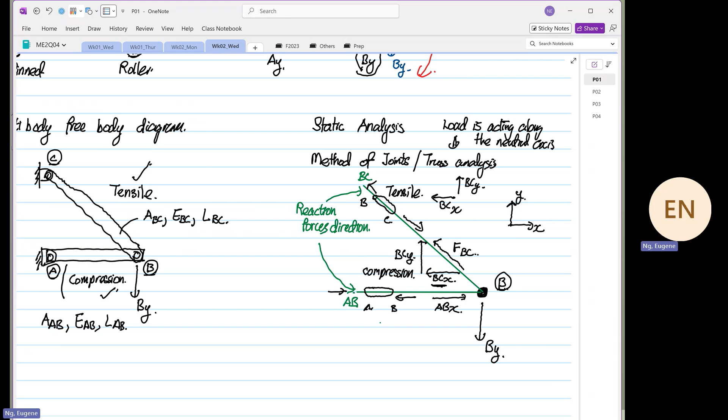So we know K is equal to AE over L. Yes? So we also are aware that this can be represented by this.

You see it now, right? So we know that this spring is going to tension, and this spring is going to compression. Okay, so this is our X and Y.

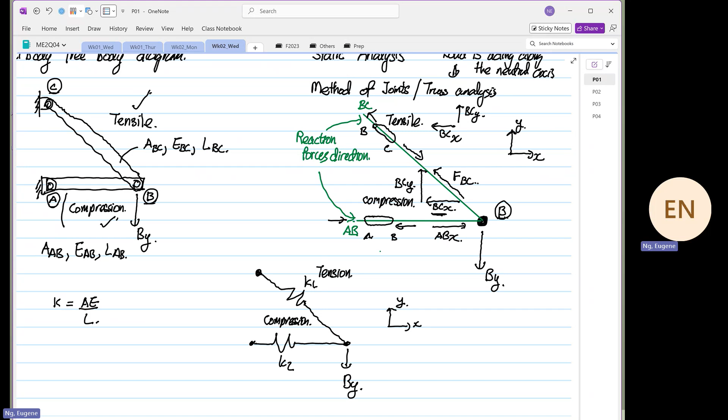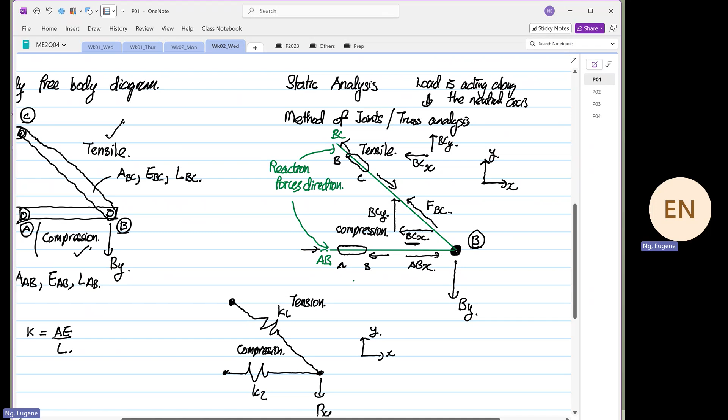Are we clear? So now you can visualize what mechanical system, like in a structure, relative to a real world. I hope this will give you the confidence to determine whether a structure goes in tension or compression. The most important thing is you have to apply Newton's third law.

Clear? No doubts? If mechanical engineers have doubt with this, it's as good as an electrical engineer having doubt about V equal to IR. Yeah, I have doubt with that, can't see it at all. But this you can see. Are we clear? Right, questions anyone? We okay?

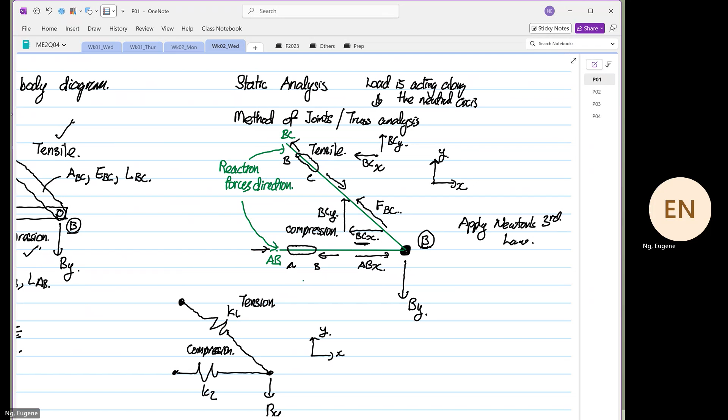Right, so let's now go to undamped free vibration.

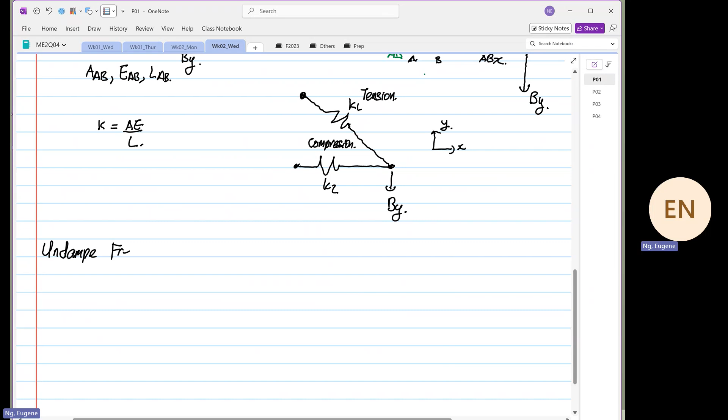Okay, so what we have now is we have a spring, and this is our K. And then with our spring, we attach a load. And because we attach a load, what we have is a mass, and then we have K.

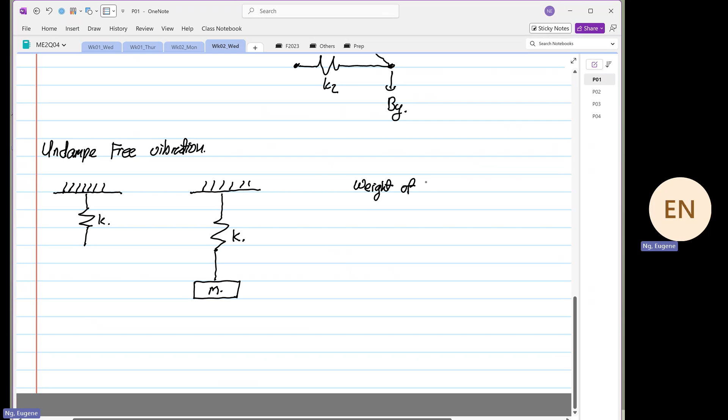I'm going to write this down: the weight of the load is equal to 89 Newton. And when the spring has a load, this is our delta Y, the extension of spring due to the load. This is equal to 0.1 meter.

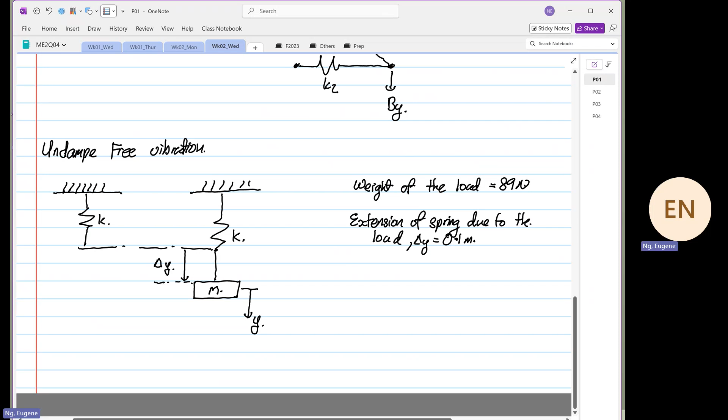And we are going to declare whatever is positive as coming down over here. So this dot over here, this line over here, is known as our equilibrium position. The spring extends due to the load.

Okay, so what we want to do now is determine the relationship between time and displacement.

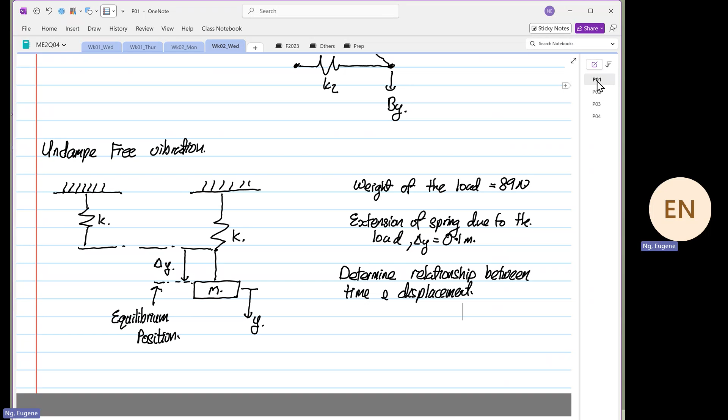What do you call an exploding monkey? My wife doesn't find this funny, but what do you call an exploding monkey? Baboon. Gee, you guys are sad bastards today, man. Yeah, I was told this joke on a Lion Safari when the driver started. I could not stop laughing until the end of the trip. And my wife was like, why are you laughing? Up to today, sorry, dark humor.

Coming back to here, so we know the characteristic equation is m d squared y over dt squared plus c dy by dt plus ky, the whole thing equal to 0, right? And we know that alpha is equal to c over 2m, and then we are aware that beta is equal to square root of c squared minus 4mk over 2m. We are aware of this, but in the system that we have.

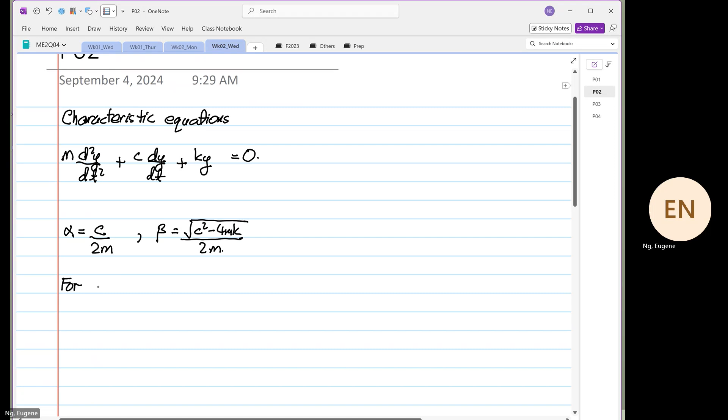But for undamped, now be careful, okay? Undamped and underdamped are two different things. Are we clear? Okay, don't be like me, okay?

So for undamped system, we know that C is equal to 0. And when a system is undamped, it will comply to Newton's first law because there's nothing to absorb the energy, and the structure will go like this.

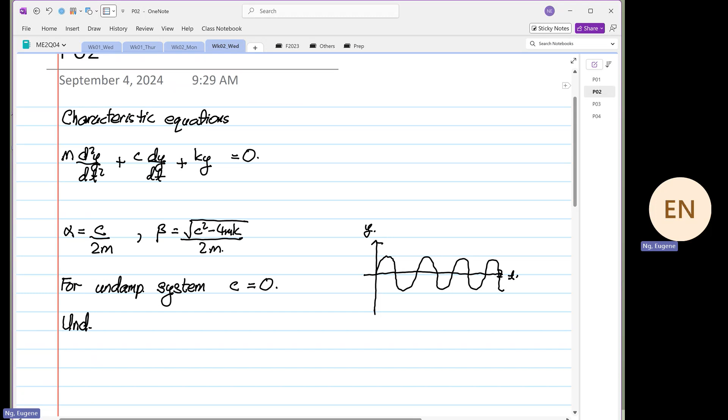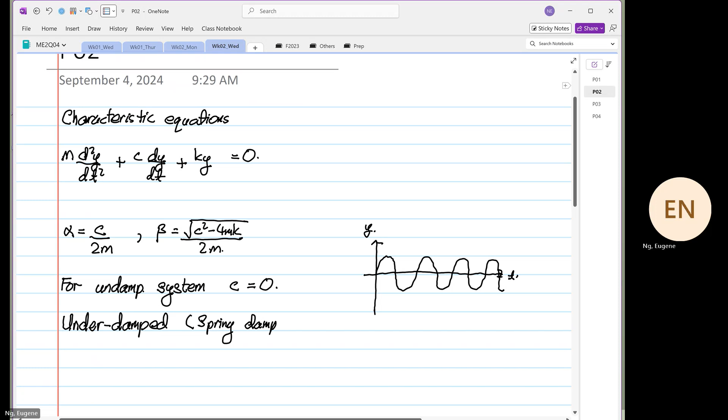So this is time, and this is our distance y, right? So for an undamped system, okay not undamped, let me write underdamped. So for underdamped system, we have spring, we have damper, and we have mass. The solution looks like this.

For underdamped, if you look at this equation, does this equation fit this signature? Yes, why? No, why? Anyone? Yeah, so it does not decay. Remember, this is our decay term.

When I was young, I asked my sister a math question. She's the top 5% in class, I'm the bottom 5 because I watch TV 48 hours a day. I have 2 eyes, one left I watch one, right I watch the other. And I asked her a math question, and she told me, Eugene, math is a language. This was when I was grade 4. Any idea what I told her? You crazy beep beep beep beep beep. Okay, but she's right, okay.

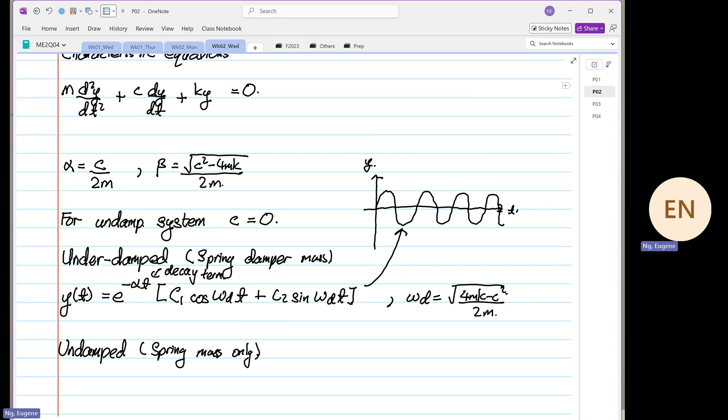So if you look at the alpha and beta, what terms go missing? So I write down again. If alpha is equal to C over 2m, right? And beta is equal to square root of C squared minus 4mk divided by 2m, right? So in an undamped system, this is equal to 0. When it's an undamped system, this will also be equal to 0.

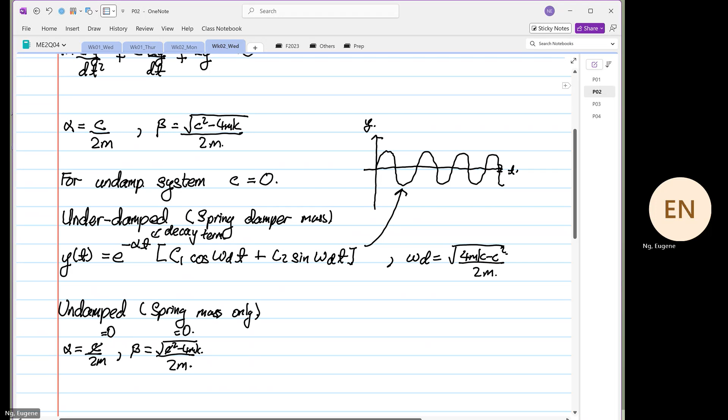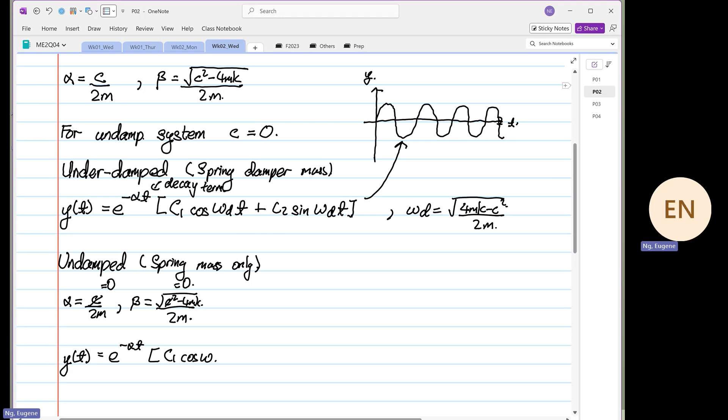Okay, so when this is the case, what we have is y of t. So let's put every term in: e to the minus alpha t, C1 cos omega dt, plus C2 sine omega dt. This term will go to become 0, e to the power of 0 is equal to 1. So finally, what we have is C1 cos omega nt plus C2 sine omega nt.

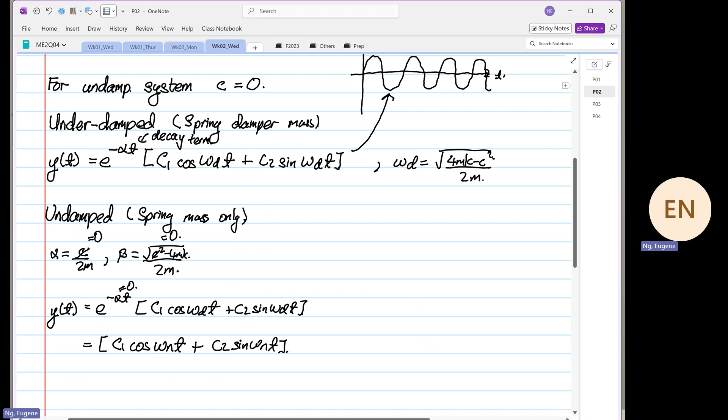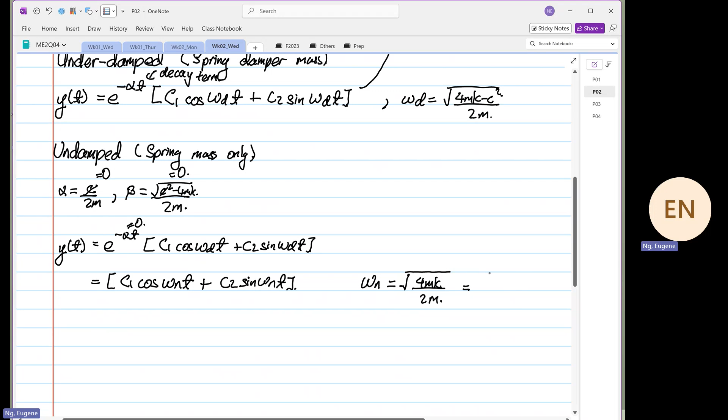So what is omega n? Omega n is equal to square root of 4mk divided by 2m. Okay, so when we were to take out, remove the square root... wait, what am I doing? If we were to remove the square root is still there. Okay, so if we were to, all of a sudden I'm having a brain fart. So now if we were to include the square to the bottom term.